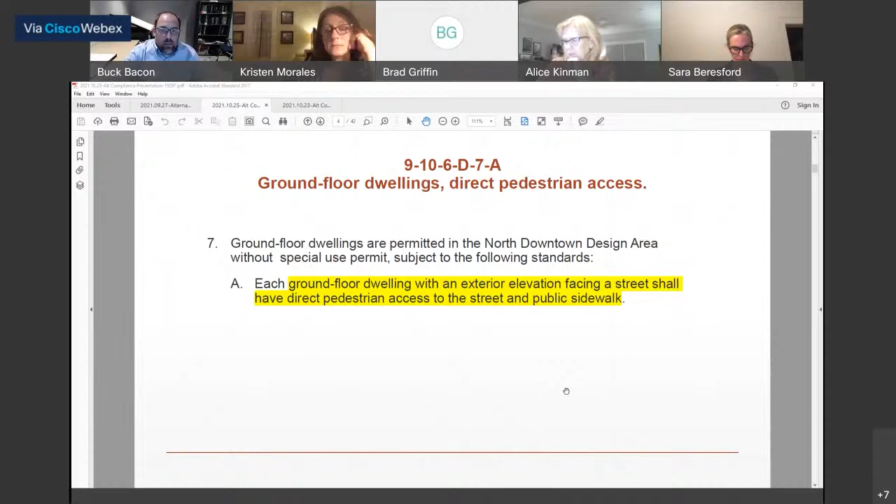The second item we're asking for is in regards to retaining walls. 910-6C8, specifically retaining walls in the front yard, rear yard, or sidewalk adjacent to a public right-of-way or private street—that's our scenario—should be set back from the public right-of-way a minimum of 2 feet for every foot of wall height above 3 feet in height. It also continues and says that terrace areas shall have a minimum 5-foot depth as measured from the upper grade of the lower retaining wall to the base of the upper retaining wall. So these are the items that we're seeking alternative compliance for.

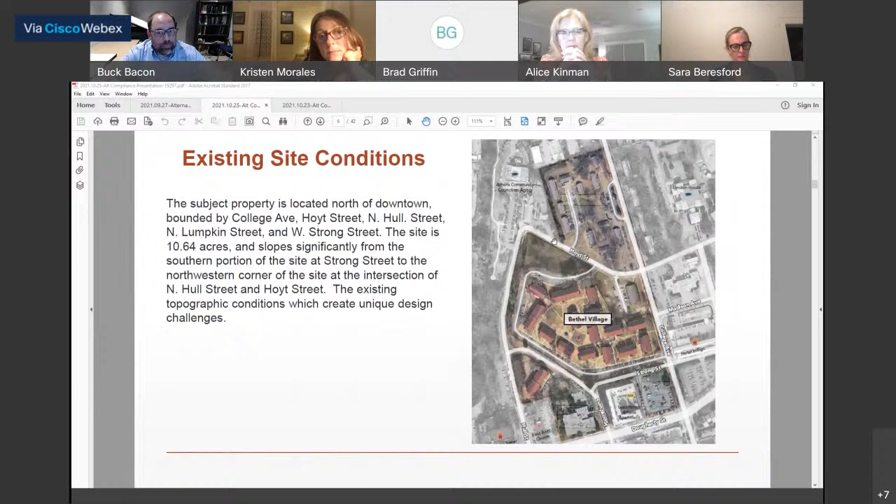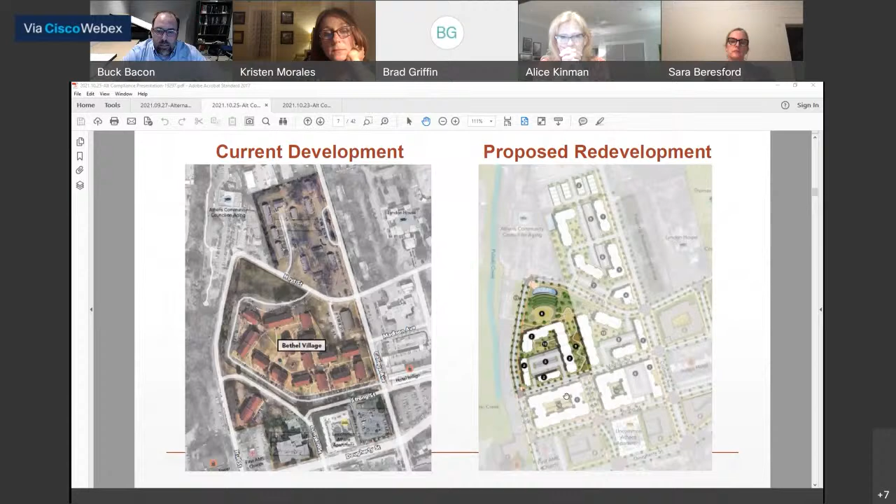If you read staff's report, one of the things they noted is that the design area and the alternative compliance for dwelling units and retaining walls does not have a specific guide for alternative compliance. Staff's recommendation was that, in lieu of these guidelines not being specifically contained within the alternative compliance documents, we should consider these general design principles: creating a pedestrian-friendly environment, establishing a sense of visual continuity while encouraging creativity and diversity in building form, promoting a mix of uses that contribute to the vitality of downtown, and conveying a sense of human scale.

So what we wanted to explain is what we don't want in our community. So the next couple of slides are images of what we don't want.

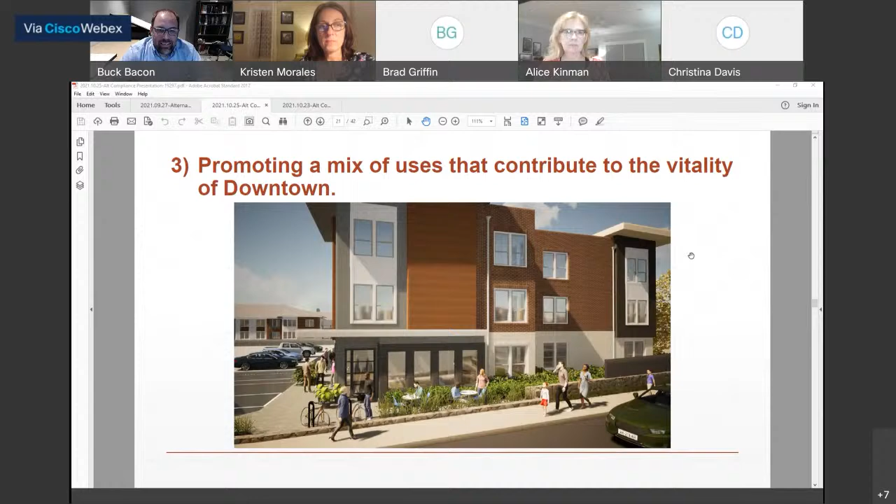So this image is another example of the building sitting higher than the street, but it still creates a continuity and creates vitality. You can see that the retaining walls here have allowed patio space below it, and so there's an opportunity for residents or community members to gather adjacent to the site.

Ultimately, as we develop future phases, there will be some commercial components. And so I thought this was just a great image of really the intent and the vision that we're trying to provide.

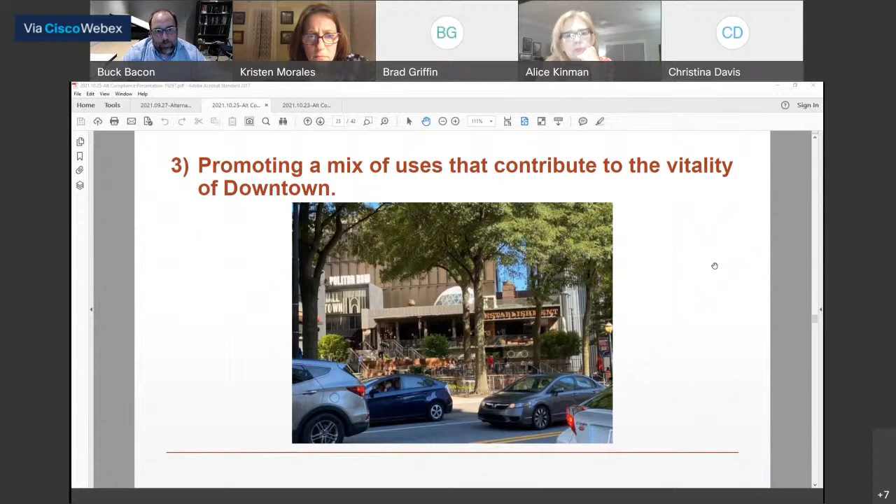So you can see that there are multiple retaining walls, multiple steps that create a sense of interest to the site, conveying a sense of human scale.

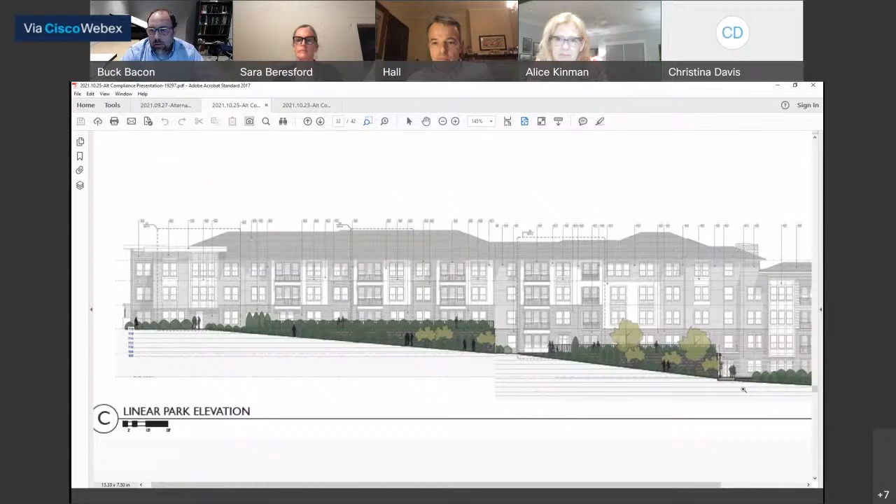And can I ask a quick question? Just as far as you mentioned human scale, I think that was the phrase, and I just wanted to clarify. I'm taking that to mean if you're walking along the street and there's things next to you, it's not just that you have the wall, but instead there's multiple sort of points of entry. Sorry, that's a design term. There's multiple things that you could be looking at. There could be some greenery overlapping a wall, or stairs, or some other visual element to break up the space. That's correct, that's correct.

I think the next slides, Buck, would be super helpful because I can tell everyone wants to get into the details of exactly where we're asking for what.

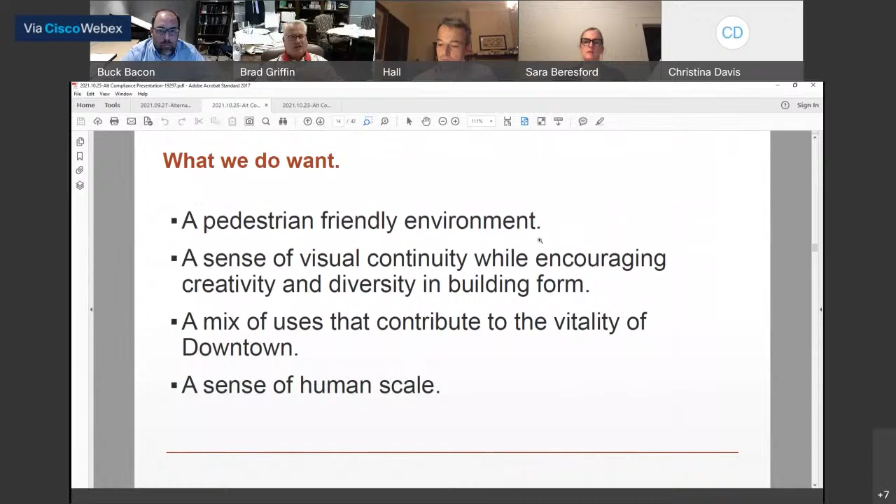I stand corrected. And where some of these break down, guys, is like the example Buck showed on the back of the Presbyterian church—there is a section of that wall that is more than 3 feet tall that is not 2 feet set back off the right of way. Once you get beyond a certain point on this wall, the rest of it, under today's standards, would need to be offset. I think what they're running into on some of their wall combinations is that the combination of height and its associated setback is pushing everything further back off the road than they're trying to get, wanting it a little closer to the street in some cases.

I just wanted to break it down because this is confusing, and we should go through each scenario so everyone is as clear as we can make it. We want to continue to address the pedestrian scaled environment. We understand the intent of the code. In instances where we are not meeting this particular code as written, whether because we don't have an existing setback from the right of way or sidewalk and need to push up to it with a retaining wall, or if the retaining wall is 12 inches higher at its highest point than the allowable height, we are softening it with landscaping. We are trying to still set it back, provide building articulation, and really try to soften that edge. We just didn't want to set back as far as we would have to—if you can imagine some of the steeper areas of the site, you would have no street, you would not address the street at all if you set back by the required ratio. We'd be quite challenged in doing so, I'd say that.

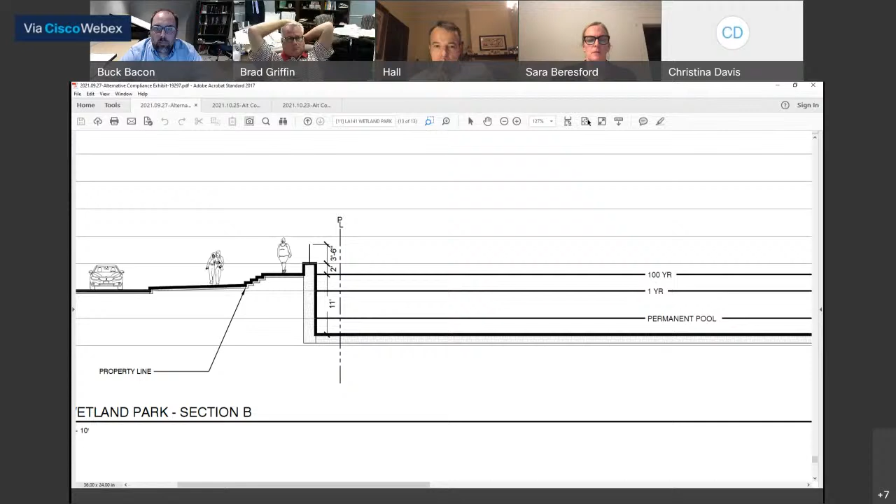So Buck, do you want to walk us around the site, the orange, maybe starting from the corner of Hull and the sidewalk there? Yeah, absolutely. Let me see if I can... So we start at the corner of Hull.

How much is it offset, this 9-foot wall?

I'm sorry, I can answer that for you in just a second. My computer is telling me my files are too big.

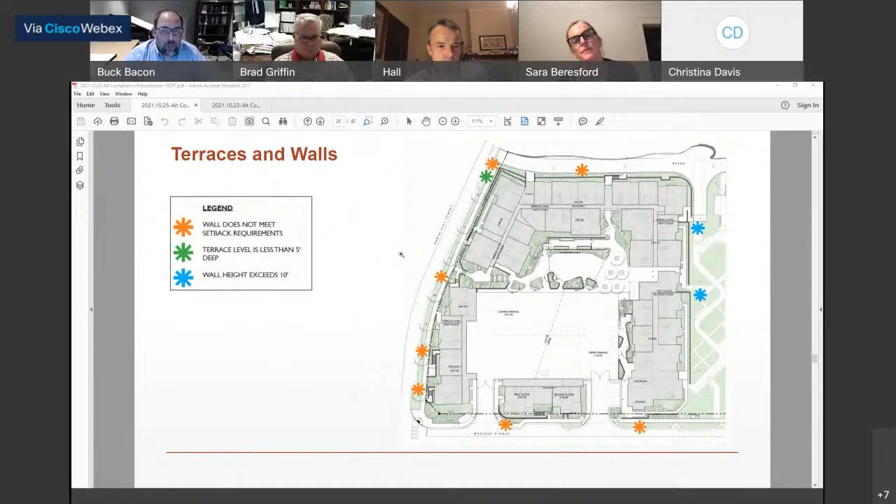That elevation you're showing us from where we're looking at Hull Street, is that the building? There's two buildings, right? Is that what we were just looking at? There's two buildings along Hull Street. That's correct, and that's building 3. So it's this building. Okay. And can you show us that? Oh, okay, perfect.

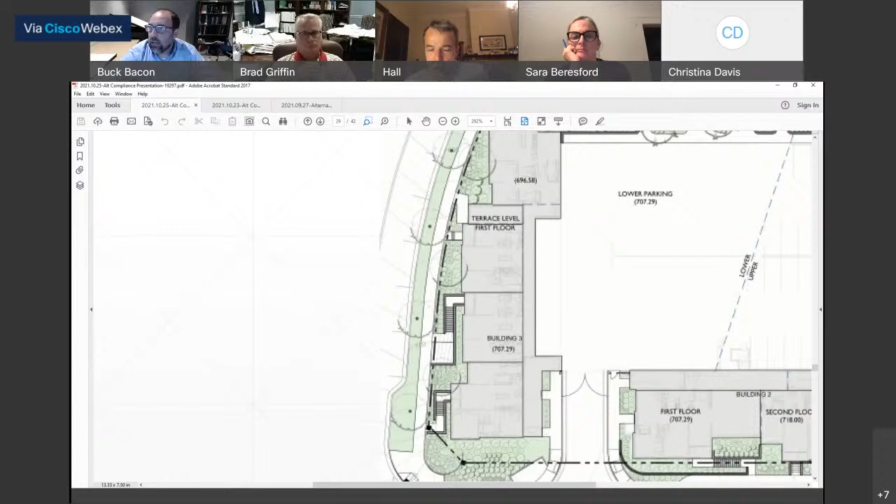So you see that the wall doesn't have a standard offset. I can also show this to you.

Just due to the profile of Hull Street? Due to the curve in Hull Street? There just doesn't seem to be a standardized setback of the stairs because the building is trying to be kind of a somewhat straight building in that regard with the unit typology, but then you've got a lot of curve in Hull Street there. Well, yeah, horizontal curve, yes.

Sorry, I forgot you guys always work with the drainage. So the offset in this situation along Hull is 3 feet from the back of sidewalk on the first wall, and 4 feet from the wall to the left.

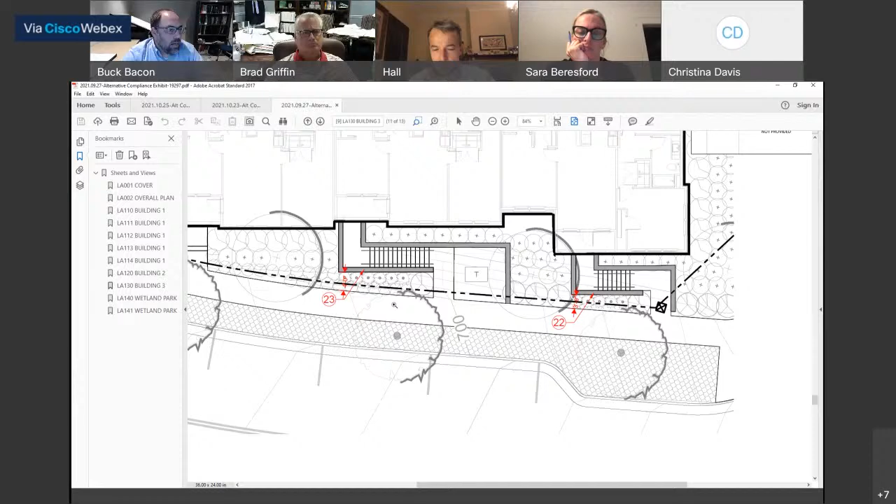And so those two walls you were just referring to, they're the walls that are 10 feet high? These walls are 9 feet maximum at its highest. So to be clear, the request in these particular instances is not the wall height, nor is it the multiple building entrances. It is simply the setback, the step-back requirement of the retaining wall, Sara.

Got it, it's just not far enough back. Or it's not as far back as normally would be required. That makes sense. So normally a 9-foot wall would need to be 12 feet back, and these are 3 feet and 4 feet back. That's correct.

I guess human scale is a very subjective term, but to me, a 9-foot wall that's right within an arm's reach as you're walking up the sidewalk doesn't feel like it's at a human scale. You're sort of overshadowed by the wall.

Can you talk a little bit about why you think that this meets the standard for alternative compliance? Because it feels pretty borderline to me to have a 9-foot wall so close to the sidewalk, when the code would say that a wall that's 3 feet back from the sidewalk could be about 5 feet high, and you're going 9 feet, so that feels like quite a jump.

It doesn't feel as human scale as a 5-foot wall would. Sure, so we feel like by softening up that frontage with vegetation, it provides that human scale, so you're no longer facing a 9-foot wall. There's a 3-foot or 4-foot verge that's planted with shrubs and greenery.

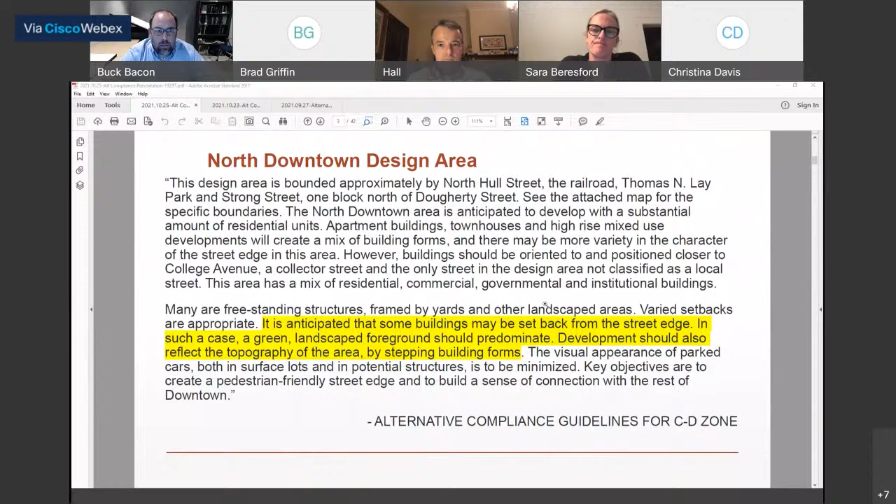So I'll go back to the code. It says acceptable exterior finish materials include but are not limited to, and I'm not saying this is what we're doing, I'm just sharing what the code requires: stucco, split face blocks, brick, stone, glass blocks, curved interlock blocks, wood, tubular steel, wrought iron bars or other grill work, textured or scored poured concrete, vegetative walls, or anything approved by the planning director.

I say all that to say I think we haven't decided on a wall material. We have discussed concrete, we discussed granite rubble. Granite rubble is what's at the Hotel Indigo, if you're familiar with that. We don't have a set material at this point, but it's up for discussion. Yes, Alice.

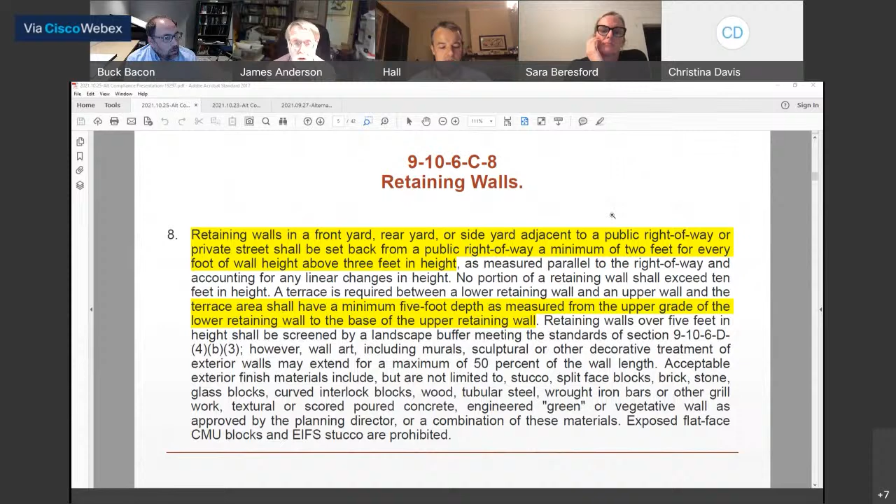I think your illustration of the First Presbyterian Church wall is quite illustrative, because I've passed by that wall many times and it never struck me as out of scale or intimidating, yet it achieves pretty much the same height as some of the walls you're talking about. The wall up front looks like it's at least at head height when it's sitting right next to the sidewalk. I don't see any problem there. I view some of these criteria for construction downtown to be extremely prescriptive and rather limiting.

I also want to chime in, I know we're a little all over the place here. I wanted to acknowledge that for this particular site, many of you participated in the master planning work, and I recall working on that and noting that water is going to flow downhill. This particular phase 1 is located right adjacent to the wetland park that treats stormwater flowing downhill. I say all that to say I think this is going to be one of the more challenging sites of this entire redevelopment. Unfortunately it's our first, but it's got some pretty severe slopes because it's at the lowest point on the site.

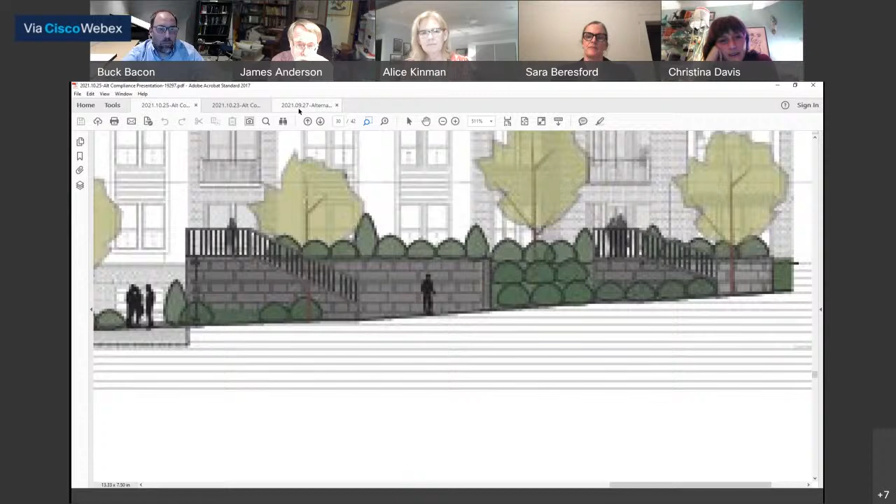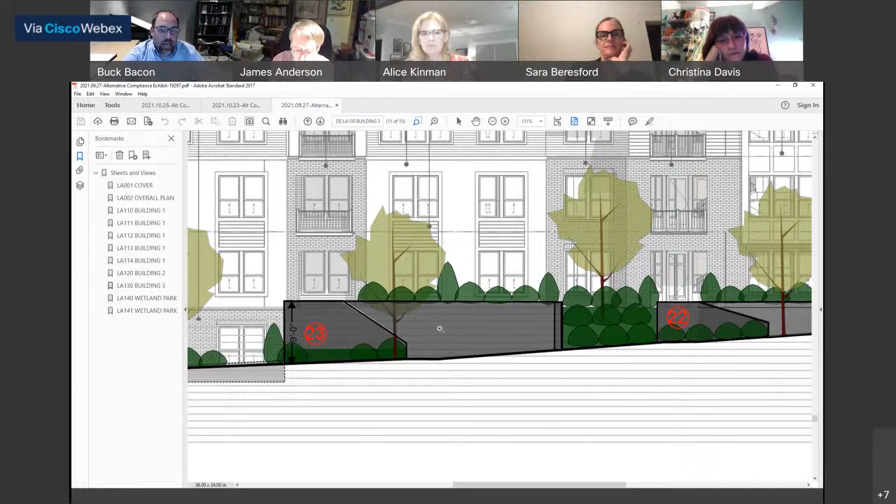So this location here, actually I have a better image. 9 foot. So you would be walking adjacent to that wall for, I'm gonna say, 10 or 15 feet. It's 9 feet at its tallest, probably 8 feet short on the other end. What you see in the background is actually another wall that meets the standard, so it's set back significantly from the sidewalk. It's only the part that has number 23 on it that's actually at the 0 setback line. That's correct, so that makes it kind of difficult to answer her question.

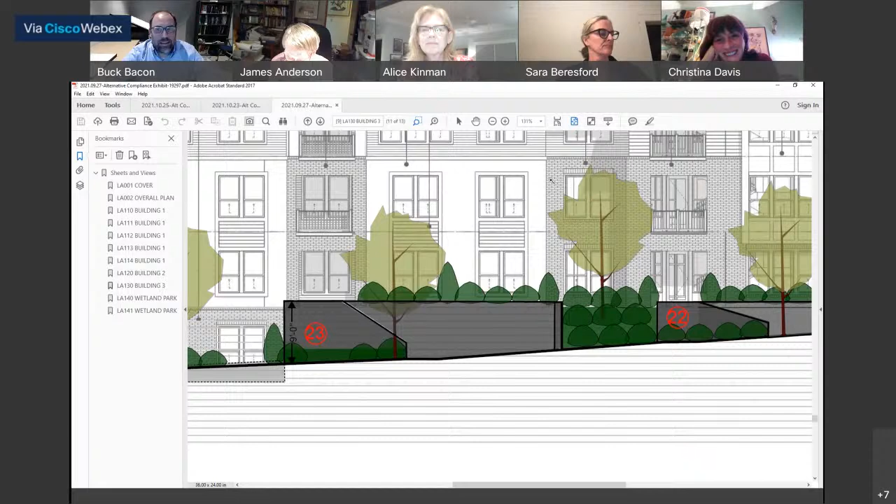So in plan view, it looks like this. You can see the internal wall that is offset from the sidewalk that doesn't require alternative compliance. You see the staircase that serves the dwelling unit, and then this is the wall that we're asking for alternative compliance for.

How long is that wall, that particular component of it? I'd say it's about 10 or 15 feet, and then it tapers down.

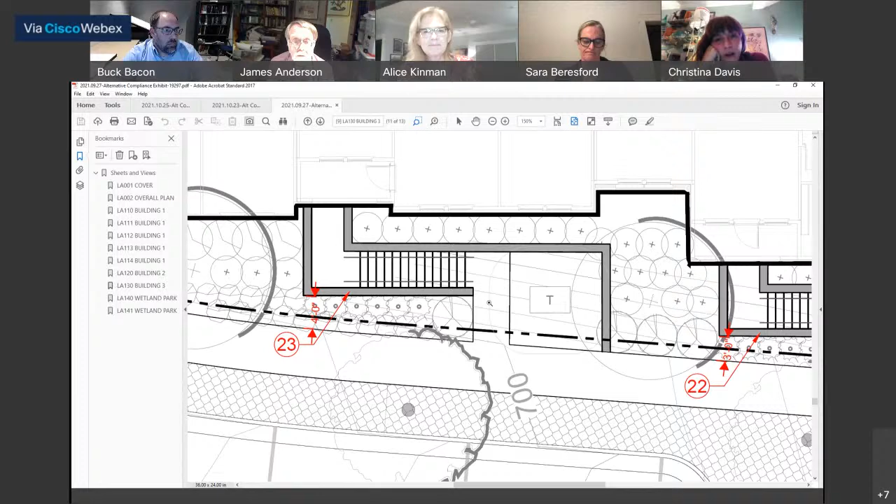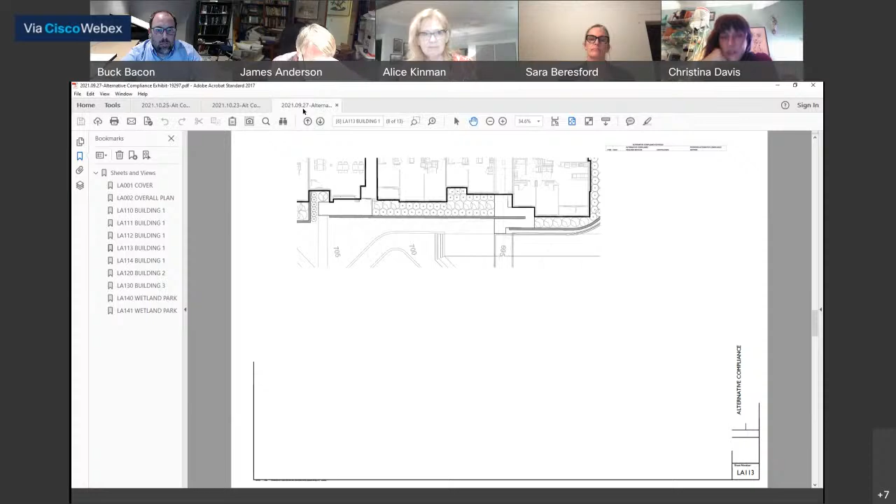Can we go ahead and keep walking down Hull Street to answer her question? Because I think there's 2 scenarios if you're walking from Madison, I say down but northward on Hull. So you would hit those 2 scenarios, but then you'd have a break in the buildings, and there'd actually be a pedestrian gate for controlled access into your courtyard.

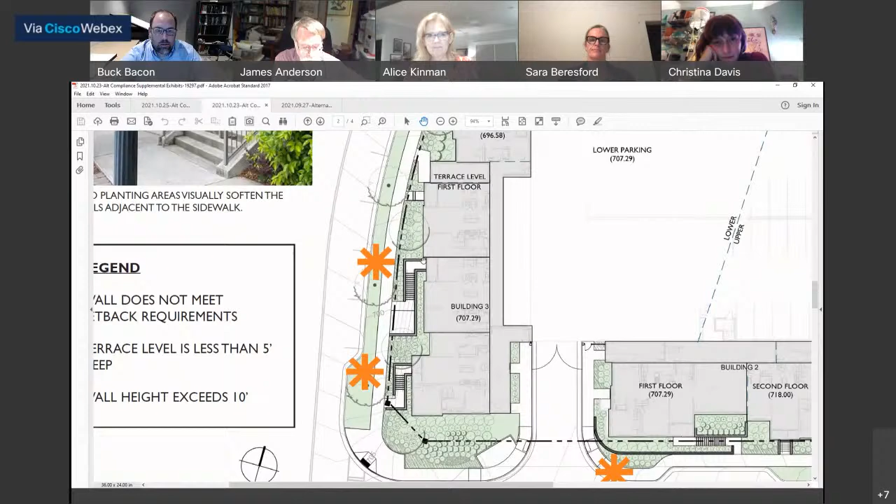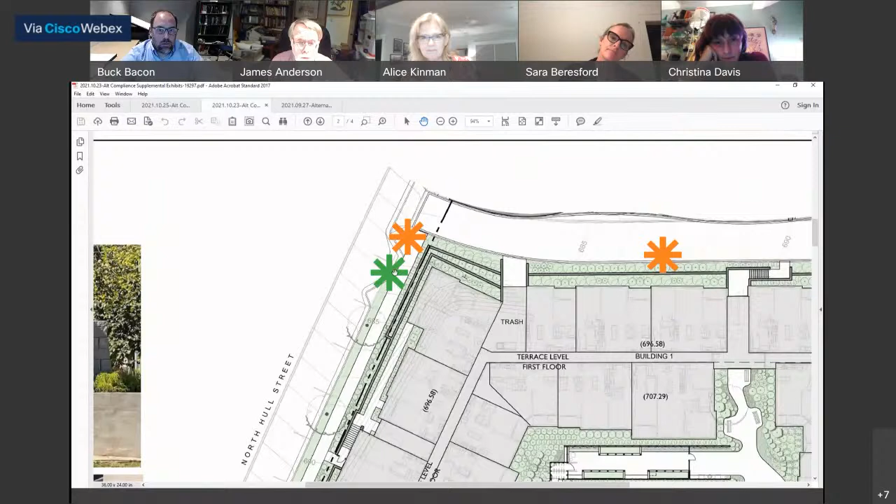He's zooming in there. So we were looking at building 3, and here's the stairs to the individual units. As we continue walking down North Hull, we have an entrance to the internal courtyard, and then another set of walls. These walls meet the standard until we get to the lower end of the building, where we do not meet the standard for setbacks and terrace widths.

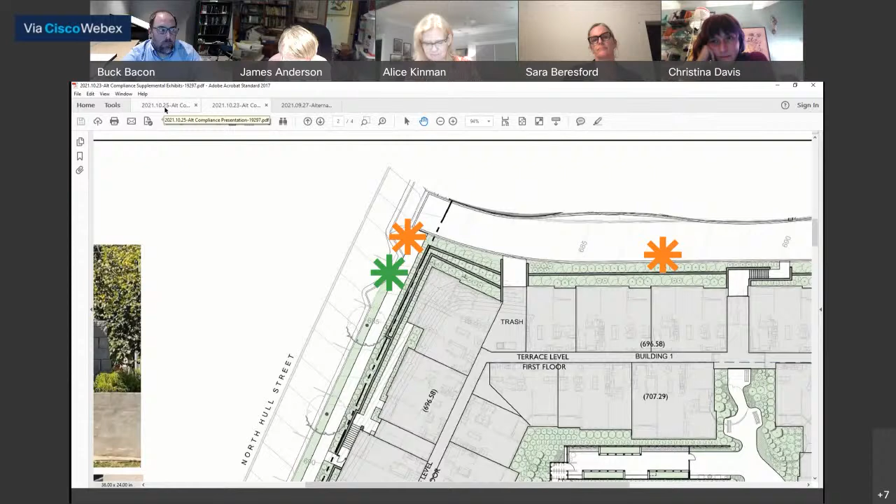Can you show us that elevation again? So this is the elevation as you walk along Hull Street. To the far right is Madison. As you come down Hull, there's a break in the building for the entrance to the courtyard, and then you continue to the next building elevation.

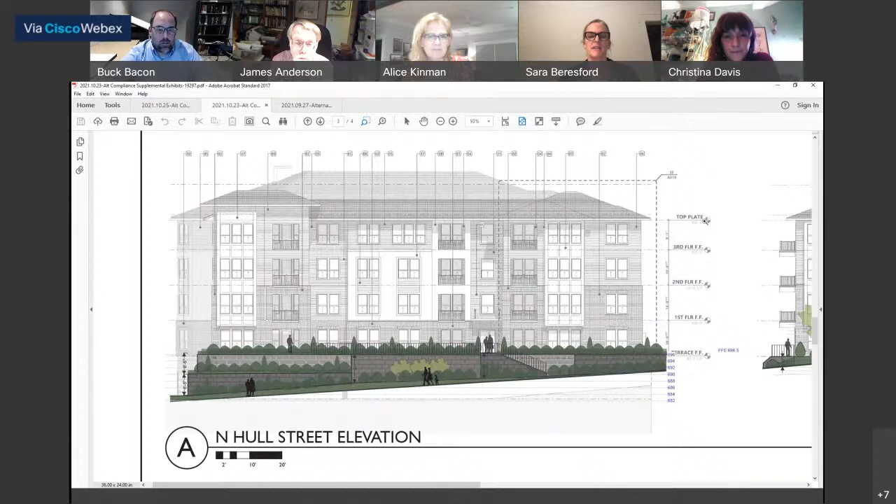Buck, is the break as shown on that elevation to scale? I believe it is to scale. It's not a very narrow passage, but I think I get what you're saying. Yeah, I was just really curious, actually. This break is also intended for fire protection. We had a lot of conversation with the fire department, and this break is intended for firemen to access the internal courtyard and the internal units.

Could I ask a question? I guess if this group were to say no, this is awful, we hate this, these walls are too high, too close to the sidewalk, what are some other ways that you could deal with this? What kind of alternative options would there be besides this?

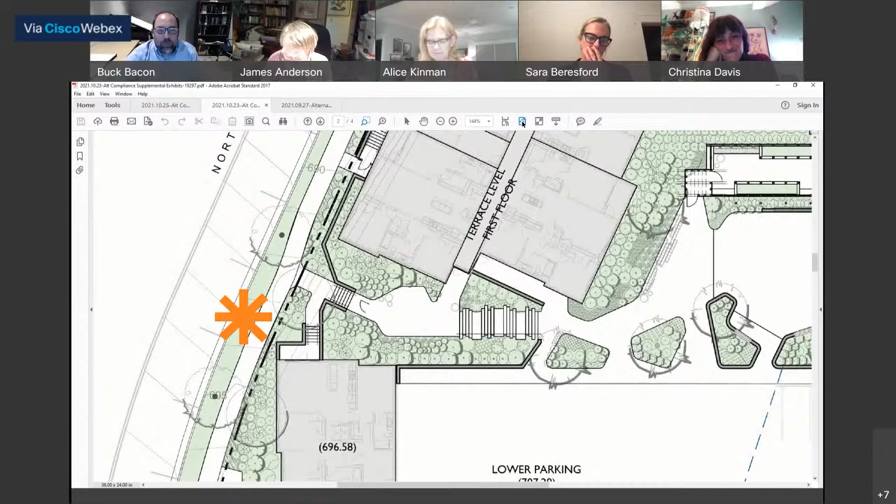That's a really good question, one we tried to sort out before we came before you. It would mean that where we have these buildings, these units on one level, in keeping with the North Downtown design area, we have the buildings stepping in form to conform to topography as closely as possible. If we were to bring this into compliance, each of these units would have to step 5 feet, which would mean putting staircases in each of the internal corridors. Our concern is this is a family development intended to serve families, and children on staircases internal to the building would become a safety hazard. It would also mean doors breaking up those individual steps, giving opportunities for people to hide behind doors, creating an unsafe condition in the corridor.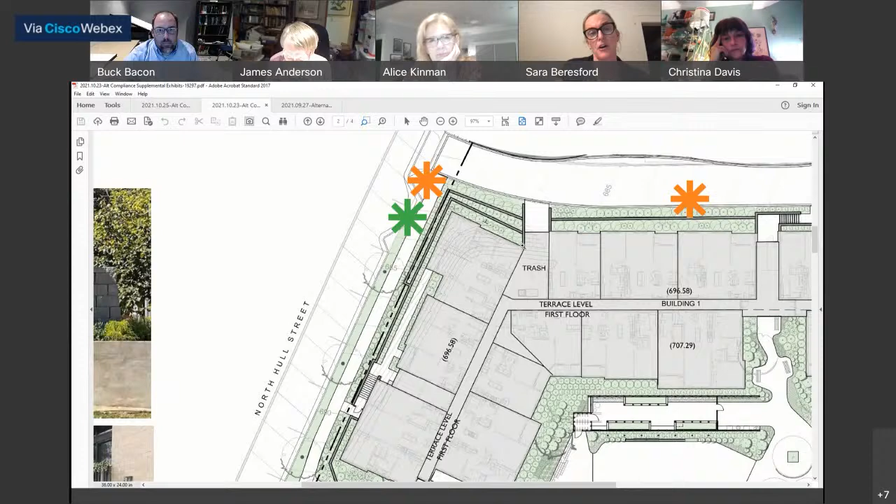This probably seems a little bit of a non sequitur, but when we're looking at this view and seeing these units opening into interior hallways, are those units multi-story, or is each unit single story? Each unit is single story.

What was the thinking behind which units get entrances? Is it that every street-facing unit should have an entrance to the street? So the ground floor street-facing units should all have an entrance, or a shared entrance in this case, to the street. But those units also open up to the back hallway. Okay, and then, Buck, you answered my question from a building standpoint, and that reasoning makes a lot of sense to me.

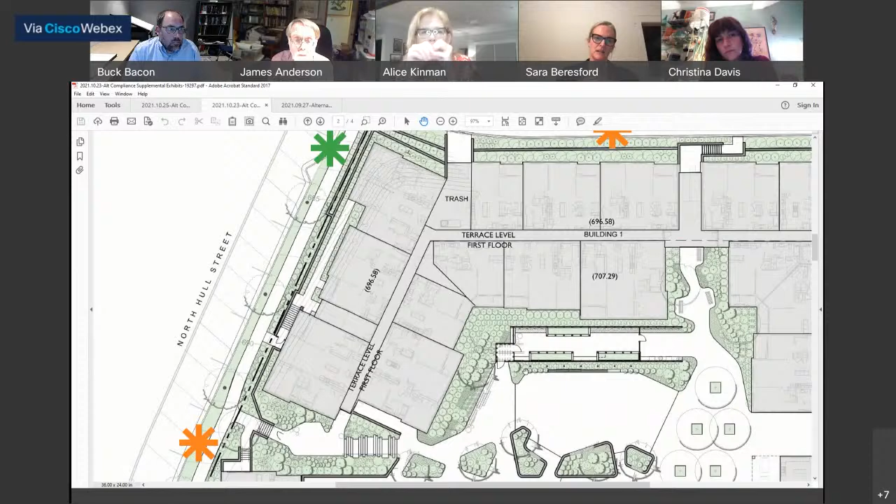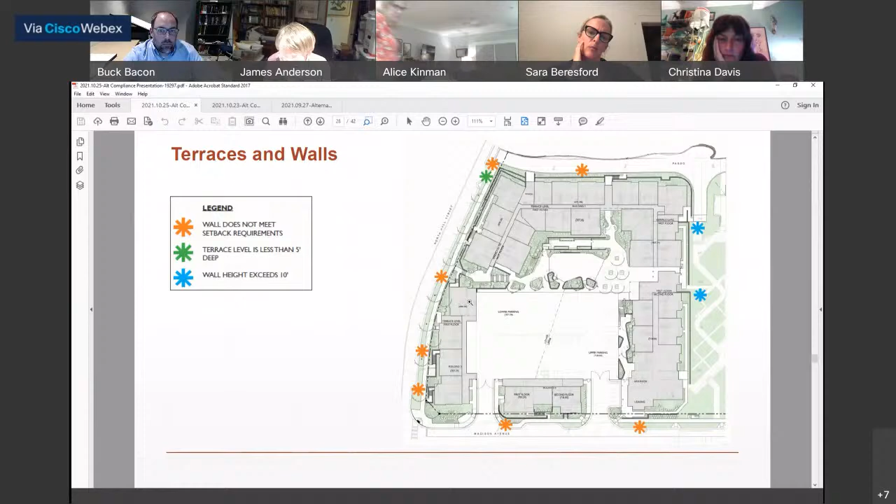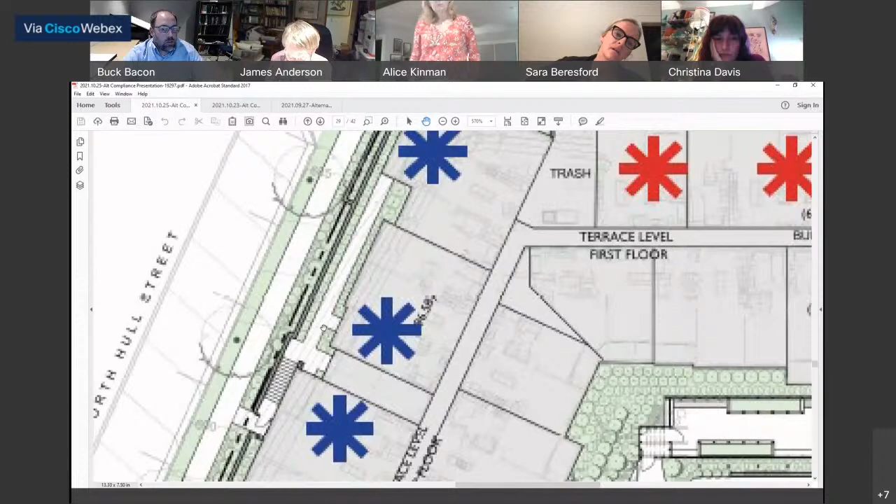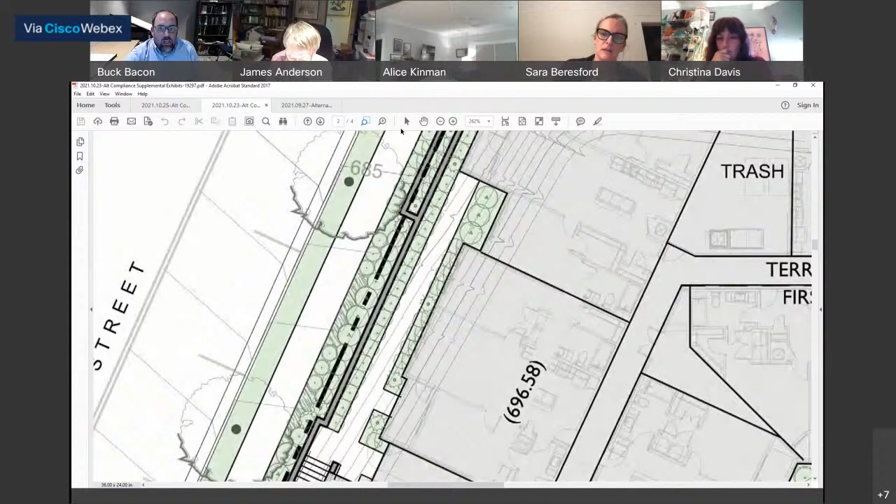In this image facing Hull Street, you can see at the top of the wall there's shared patio and sidewalk space. And the one you're showing now, that linear sidewalk, who's using that? It would just be the residents of these units, in that case, of that one unit. It would be shared between these 3 units here.

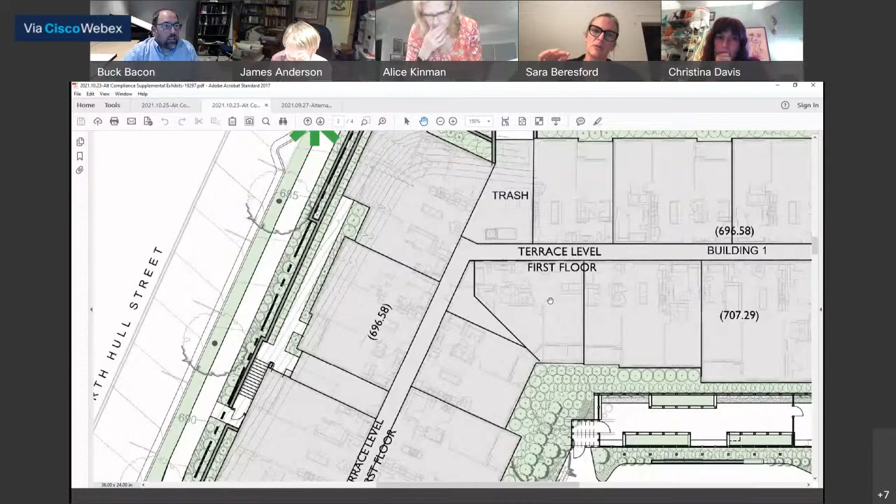Do those units have balconies or any other outdoor access? They do. In this image you can barely make out a patio here, there's also a patio here, and another private patio here. So each unit does have a private outdoor space, and they feed into collector sidewalks that feed into a collector stair. In this case, 3 units feed into that common sidewalk; other cases have 2.

I think what's sort of challenging about this, thinking about downtown, north downtown, is that it's one thing what we want to experience as a pedestrian in the area, and it's another thing to think about the experience residents are having, and the privacy that a ground floor dweller might want. These walls do help establish a bit of privacy for those residents in some cases. So while the 9-foot wall scenario is not ideal, there could be a silver lining as far as a resident goes.

For what it's worth, when we got into early concepts way back in the beginning, I think we all knew that coming out of the block, this area was the hardest on this site in terms of trying to hit grade at street level and maintain cost-effective construction. So as the blocks come on, it's going to get a lot better. This is where it gets super steep, right across from the council, and trying to fit it in, we knew it would be hard.

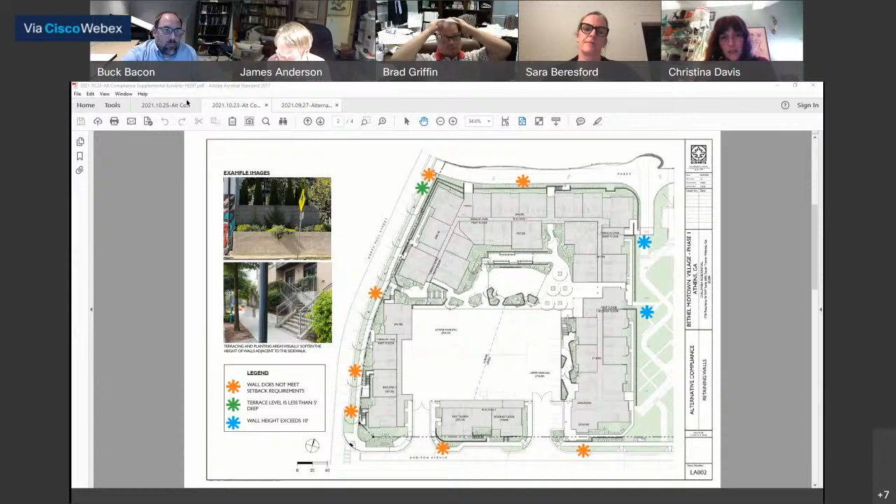I wanted to acknowledge what you were saying, Sara, about the pedestrian environment. Buck and I were discussing earlier that this is really the transition. This block in particular is a transition from the downtown urban core - we're on the edge of that - to the single family, more quiet street. I'd just acknowledge that this particular block within the overall development is kind of unique in that aspect.

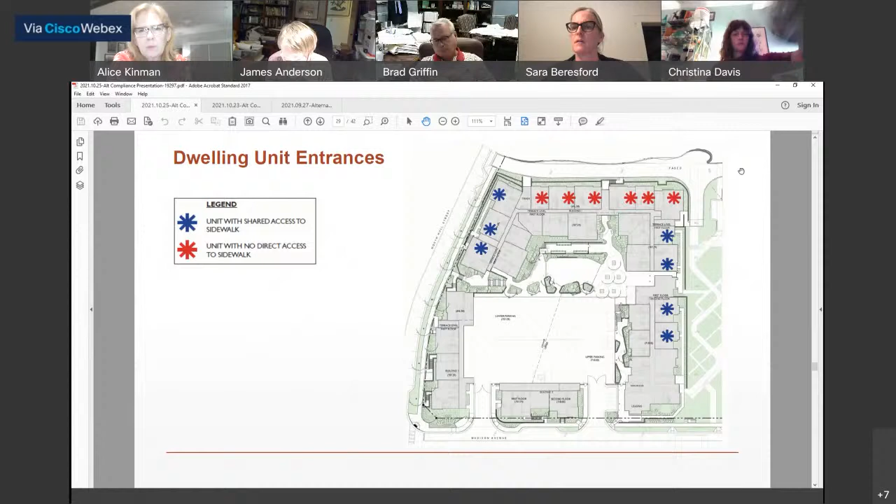Thank you. I feel like this has been a very productive discussion, and I feel like I very much understand where these alternative compliance sites are. I think the applicant has done a really good job addressing the problem. I appreciate the presentation, Buck, and I'm prepared to make a motion to move forward with this. I don't want to end discussion, but I want to signal that I feel very much inclined to approve this type 3 request.

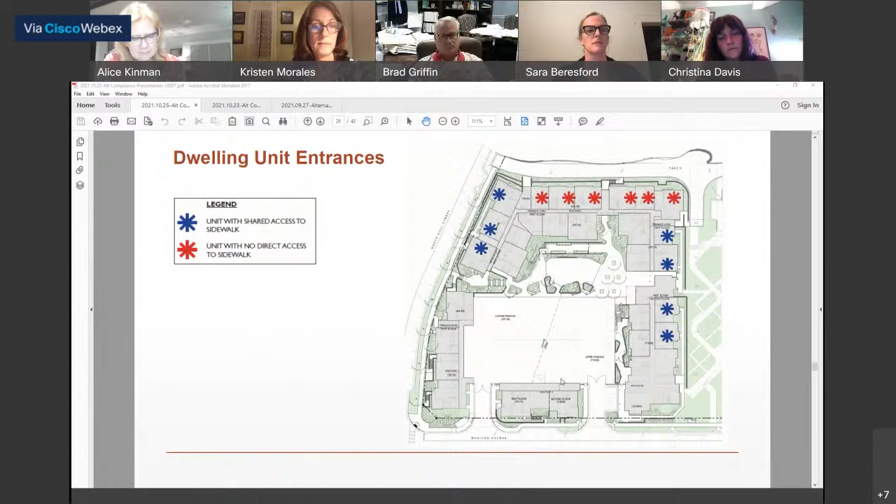Does anybody want to second that? I'll second that. Are there any further comments or discussion about this? Sorry, I can't see everybody at once right now, so I'm looking. I did want to say something.

Go ahead, Kristen - and honestly, Sara, it's kind of echoing what you were saying. My main concern was some of the heights of the walls, but I see how it's really just a portion of a wall, and we're dealing with the grade, so I understand how that changes the scenario. It's not like one large monolithic thing, and I really appreciate the perspective from the residents of having that separation from the street, because it's a double-edged sword living in a place that opens right up on the street, where people could be walking straight past your house, but it does offer that separation and privacy. So I appreciate that, and given that it's a challenging site, I'm honestly really cool with what's been done here.

Brad, I have a question for you. I had asked a little bit earlier about materials, and to me it always comes down to materials and landscaping - that's the thing that brings something that doesn't feel human scaled into scale for me. When Buck went to the slide, we were looking at the materials, and that's a pretty wide variety. I don't want to get that granular about what materials are used for the walls and get into micromanaging that, same with the landscape. But as far as the design guidelines go, can you refresh our memory about how landscape plays into things ordinance-wise, if at all?